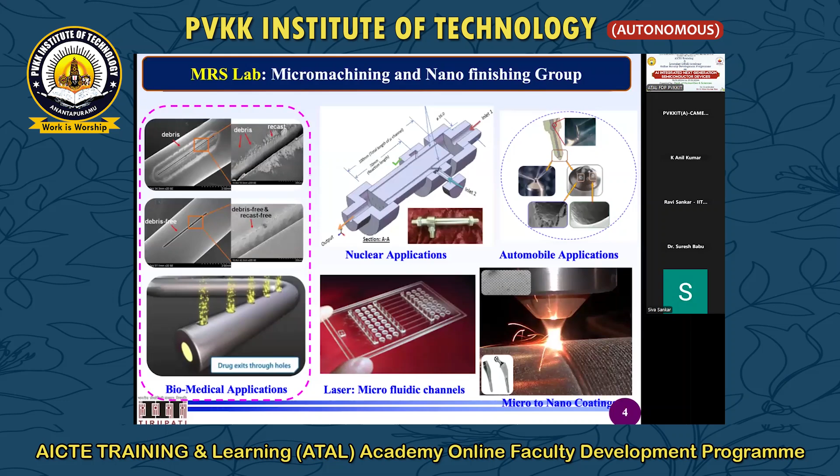That is evident from your mobiles. Mobiles will always heat up. When they heat up, there will be a cooling fluid, and this cooling will be circulated in the microfluidic channels. That is most important in the semiconductor industry. As important as the semiconductor materials are, the cooling channels and cooling materials are also important. I will just brief you on micro channels that we can cut with lasers and various other sources for nuclear applications and so on.

This is a machine. This is not the exact machine that we have. This is DT110, which is an older machine. What we have is DT110i, which is an intelligent machine where we have micro turning, micro milling, micro EDM, micro drilling, micro EDM drilling, micro wire EDM, micro electric discharge grinding, micro die sinking EDM. Apart from it, micro laser, and another attachment specialized for ceramic applications like semiconductors, that I will show you in the upcoming slides.

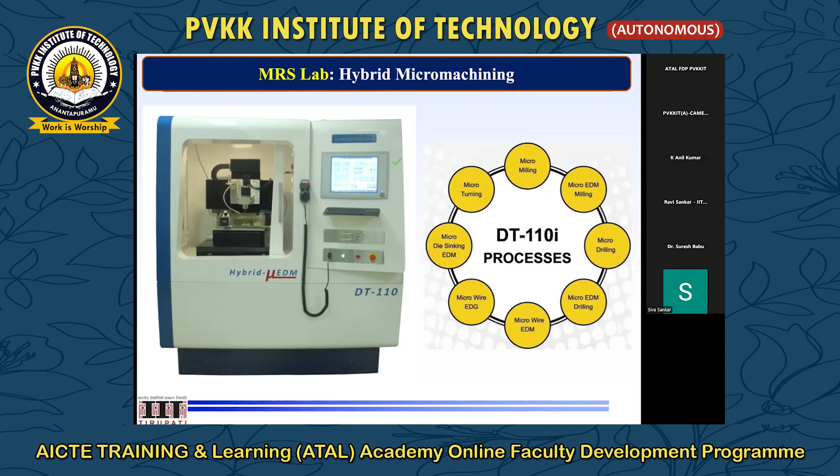That attachment is called simultaneous electric discharge chemical machining. It is a combination of EDM plus ECM. So this is how micro turning is done for making electrodes of 30 microns, 50 microns. You may be thinking how this is relevant to semiconductor applications. In semiconductor applications, for example, I want to make channels for cooling fluids, or any fine elements that I need to manufacture.

So what I require is to make the surface area more. If I want more surface area, I need to make more and more micro components, for example, fins. The more fins you can manufacture, the more heat you can dissipate. And you have to manufacture them on a material called OFHC copper. I don't know how many of you are aware of OFHC copper. It means oxygen free high thermal conductivity.

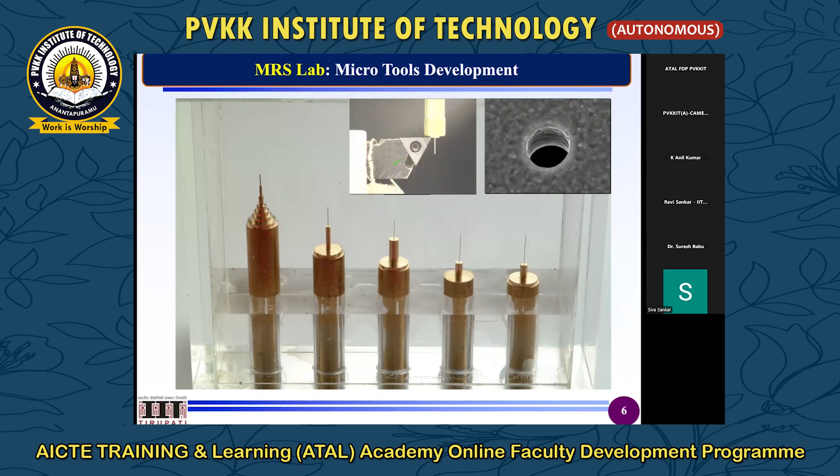These types of materials we manufacture, and this will go directly onto the top side of the chip. Whenever the chip heats up, this oxygen free high thermal conductivity material will take the heat and dissipate it. That's how the cooling of your mobiles happens. For that application, this is one of the beautiful processes. Now you can see here the microfins and micropillars.

This has multiple applications. One, you can dissipate the heat. This directly sits on the semiconductor chips and dissipates the heat. At the same time, if you make an array of surgical pins, the pin diameters will be very small, like 10 microns or so. This will act as a die for drug delivery systems. So an array of pins can be used either for semiconductor applications or for biomedical applications. Now, what is the beauty of this?

The beauty of this one is, if you combine semiconductors with biomedical applications, you can use this particular thing as a die, where you make a silicone mold. From the silicone mold, you can make another one where you have a flexible biomedical point-of-care drug delivery system. I don't know how many of you understood.

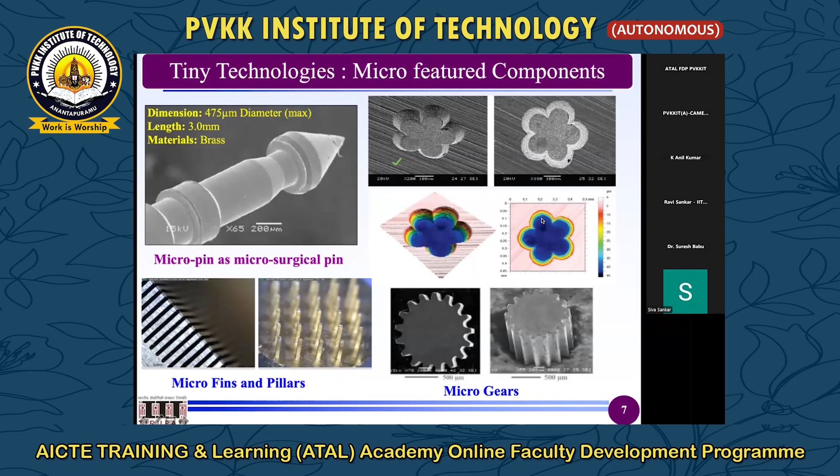The second one is simultaneous electric discharge chemical machining. You see how smooth this is? This will be clearly explained in the next slide.

Case number 1 is on a semiconductor material — I'm purely explaining on a semiconductor material. So I want to make a pocket on a semiconductor material, such as silicon. What can you do? Being a semiconductor, it has certain electrical conductivity properties because it's not purely an insulator. In that circumstance, the surface roughness you get is this. In the other case, simultaneous electrical discharge chemical milling or machining — because the tool is rotating, it's called a milling process — you get a very, very smooth surface.

Now you see the difference here on a semiconductor material. I am not talking about any other material because this process is specifically on semiconductors. You see the red line — that's the surface roughness measured from the micro-EDM process: 142 nanometers. With the same input conditions, simultaneous EDM plus ECM gives 22 nanometers.

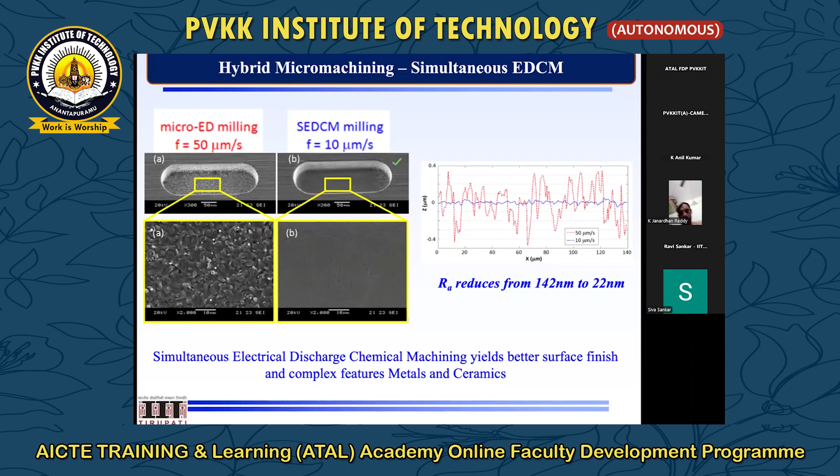When it comes to completely nano finishing of semiconductor materials, the objective is to finish mirrors and lenses that can be made on materials like zero-dur. I don't know if many of you are well aware of ceramics like zero-dur.

Zero-dur: zero means, anyhow, it is zero. It is one type of semiconductor or lens material, whose thermal expansivity is approximately zero. That means the thermal coefficient of expansion is approximately zero.

So what is the beauty of it? We send a lot of electronic components across the planets. For example, if I want to send something on the moon, or if there is a Mars rover.

When you send something to the Mars rover or to the moon or any other planet, once it lands, the equipment comes out, the satellite comes out and starts taking images. When it starts taking images, what is the biggest thing you have to understand?

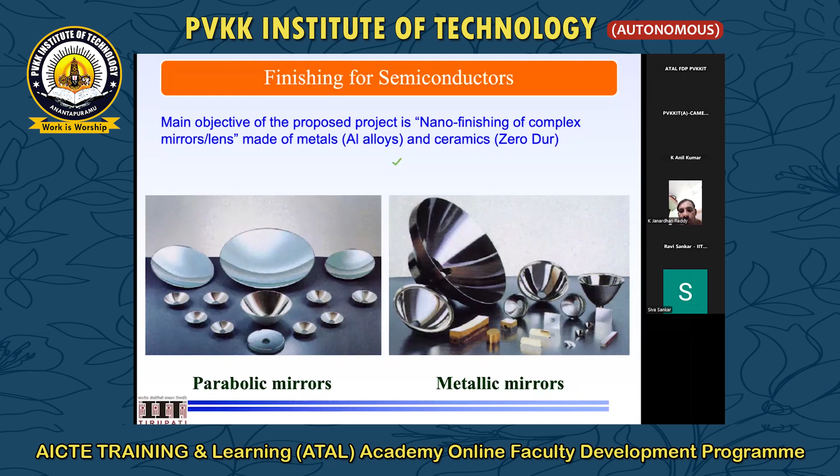As simple as that. For semiconductor applications, silicon applications, all these applications, when you send them there, you need to understand these particular things.

So the first process one can use is magnetorheological finishing process. Let me show you, I am pumping the liquid. I'm just looking for a video to demonstrate this.

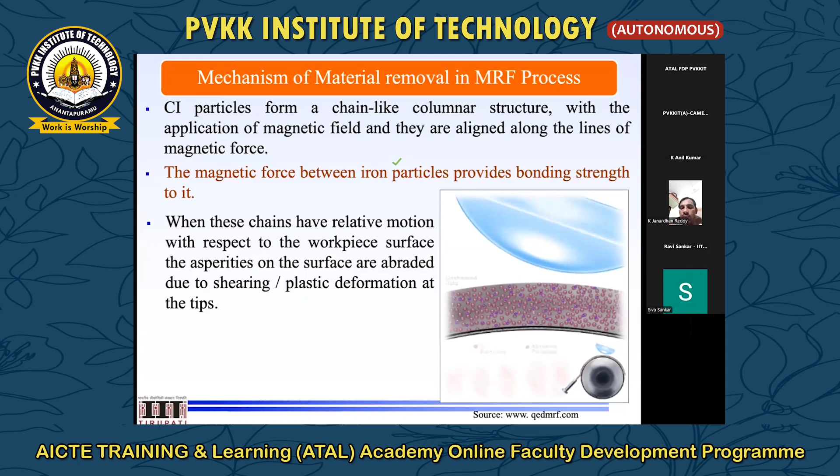You can see the liquid I am sending, and as I apply a magnetic field, these brown particles form chains. When randomly oriented, they're scattered, but when I apply a magnetic field, all get aligned properly. Brown ones are CIP particles, iron particles, and purple ones are abrasive particles. When it forms a flexible magnetic chain, the lens comes in and finishing takes place.

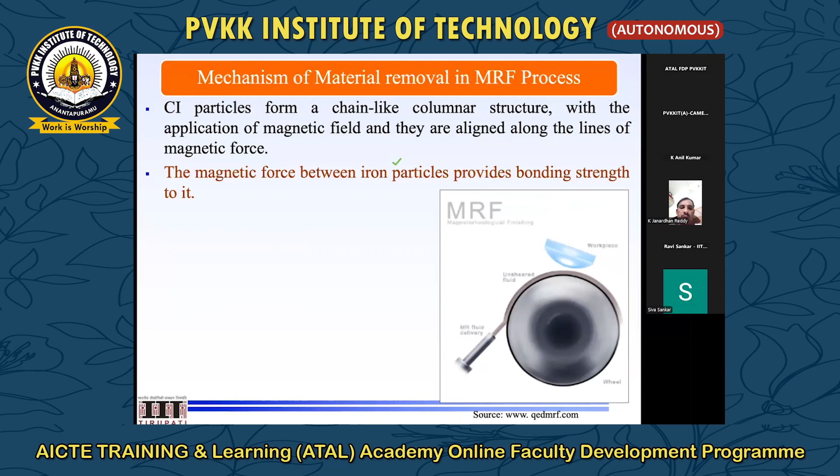Let me go back to explain this better. The same thing you saw, I am pumping it through the nozzle. There is an electromagnet, and when the fluid reaches it, it becomes solid or semi-solid. The liquid becomes semi-solid, and when you apply a silicon lens or any type of lens, polishing takes place. You can see the liquid flowing, and when it touches the flexible grinding wheel, it forms a strip, because of the magnetic field.

Why does it form this strip? It has three materials in it: one continuous phase, silicone oil, and two discontinuous phases - one is CIP particles, which are carbonyl iron particles, meaning 99% pure iron particles, and another is abrasive particles. You mix all these things and send them through a nozzle.

When it reaches the electromagnet, it magnetizes. When it magnetizes, what happens? When you apply a magnetic field B, magnetic field intensity, like 0.25 Tesla, 0.5 Tesla, 1 Tesla or something - normally magnetic field intensity is measured in terms of Tesla.

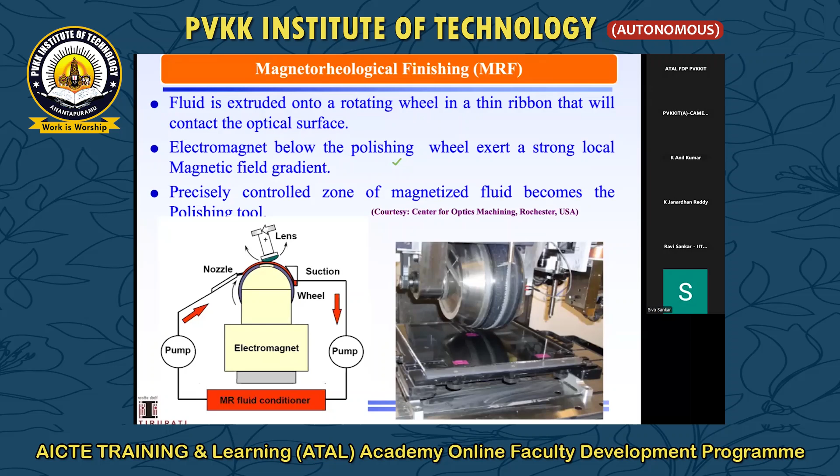Now, for structure, if you have fewer abrasive particles, you can go for an open structure, and if you have more, you can go for a dense structure. The bonding material here is CIP particles and so on.

Now you can see which type of lenses you want: 3D lenses, 2D lenses, concave lenses, these types of lenses. Semiconductor materials can also be used for the same thing. This works very well for brittle materials like silicon, silicon carbide. Nowadays people are talking about silicon carbide mirrors. Silicon carbide is coming as a very good alternative for semiconductor applications. In some applications, silicon nitride is also coming up in a great way for radome applications where you capture signals and other things.

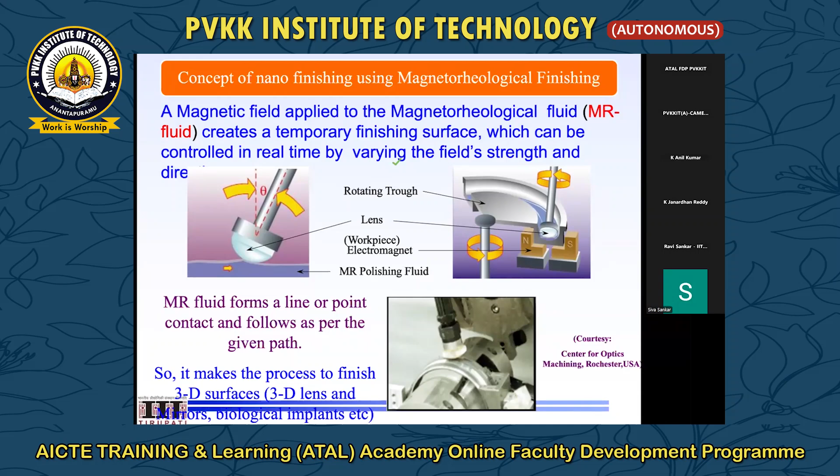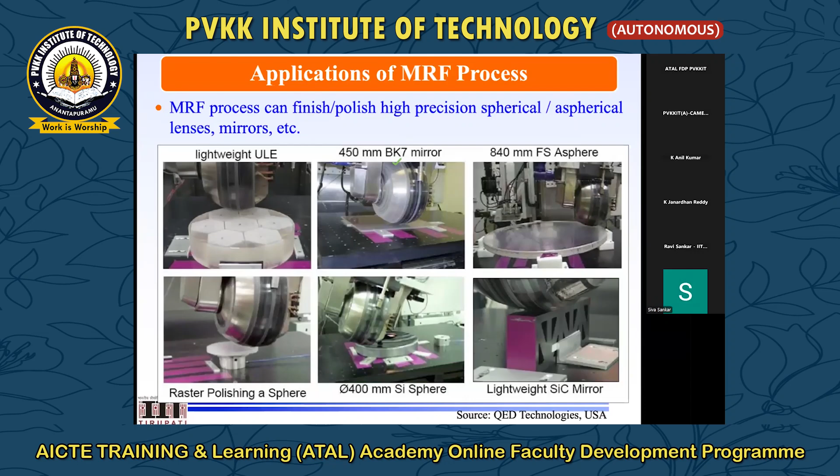This is one of the MRF setups that we have fabricated on a milling center, a CNC milling machine. This is the CNC milling machine where the attachment has been removed, the tool master has been removed, and we fabricated this in our laboratory at IIT Kanpur, here where I am currently. I am not in IIT Tirupati anymore, I just came to IIT Kanpur. I am very happy in my one of the home institutes, that is IIT Kanpur.

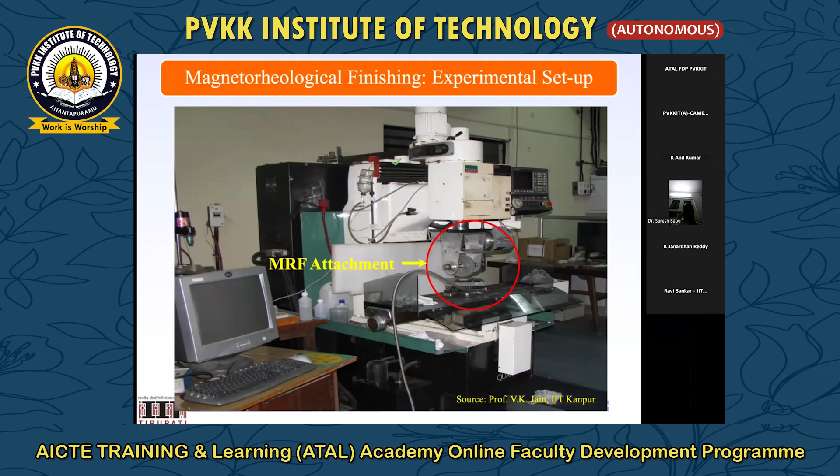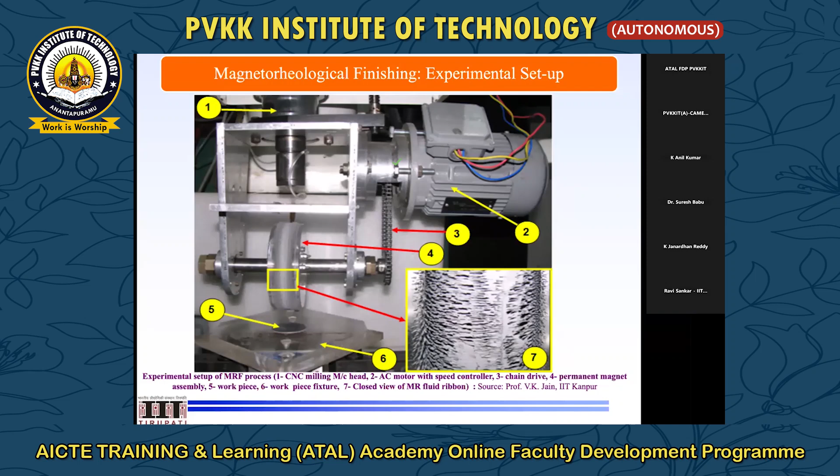So this attachment, if I magnify it, I will show you, it looks like this. If you see here, I have a pump where the liquid is coming here, and this is a perspex based, acrylic based grinding wheel. In between that you have an electromagnet. Once the liquid falls, it forms like this. This is called a flexible magnetic abrasive brush. When you see a flexible magnetic abrasive brush, this is going to shear when you rotate it. So shearing of this will make a very good polishing solution.

This is how the schematic diagram also looks, because whenever you have a setup, first and foremost you have to make a schematic showing where you want the wheel, where you want the suction pump, where you want the releasing pump, and how the MRF conditioner can be maintained and so on. These are all the things you need to do, then you need to design it.

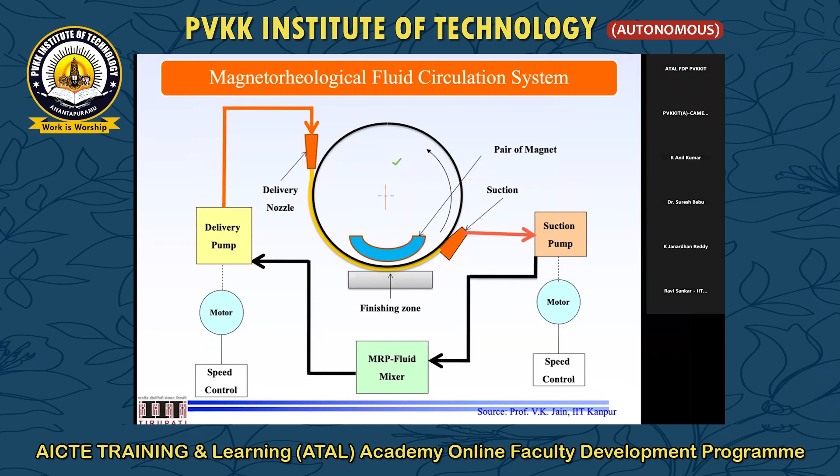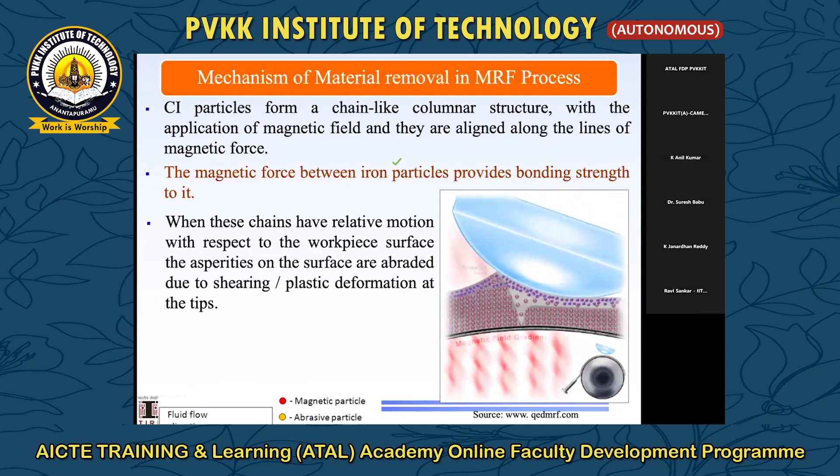Now the mechanism of material removal. If you see here, the mechanism of material removal can be seen clearly. This is the animation which I am not going to talk much about, but this is how the finishing takes place.

Stages: I have a surface peak. When my abrasive particle approaches, what happens? The magnetic field holds the CIP particles, these are all called CIP particles. Now this will support and move it. When it moves, what will happen? Microchipping action will take place.

This micro-chipping action is for one particular peak. Similarly, you may have as many peaks as possible. That's why you do the finishing action. Sometimes your results may not be as accurate as you expect because of some practical problems. If you see here, I have an abrasive particle, and I am finishing it.

When I start finishing it, my particles which are sheared will fall inside the valleys. If you measure the surface roughness, it will give you a very low surface roughness because your chips are inside. So when you still polish it, what will happen? There is a chance that these loaded particles will dislodge, giving rise to a larger roughness value.

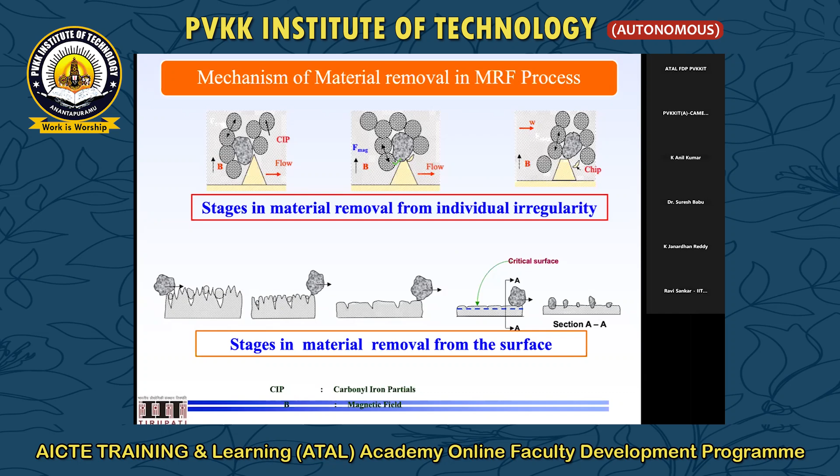So that means the surface roughness increased, which is good for us. After that, it decreases. I mean, it decreases, then it increases, and so on. So you should understand the science behind it for that purpose and other things.

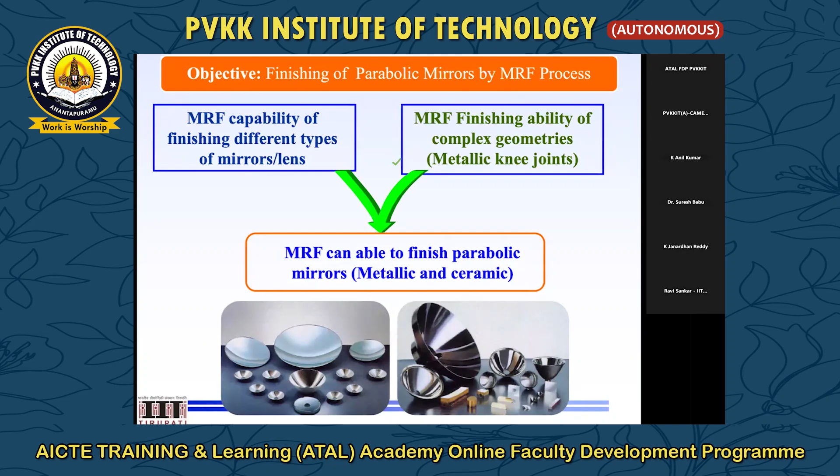Anyhow, these are the things that we have polished: knee implants, parabolic mirrors. For example, if you see here, these are the MRF capabilities to finish ceramics as well as metals. Another one that we have is convex and concave shapes by ball end. The mechanism is approximately the same. Instead of going for a wheel type, we are going for a ball type.

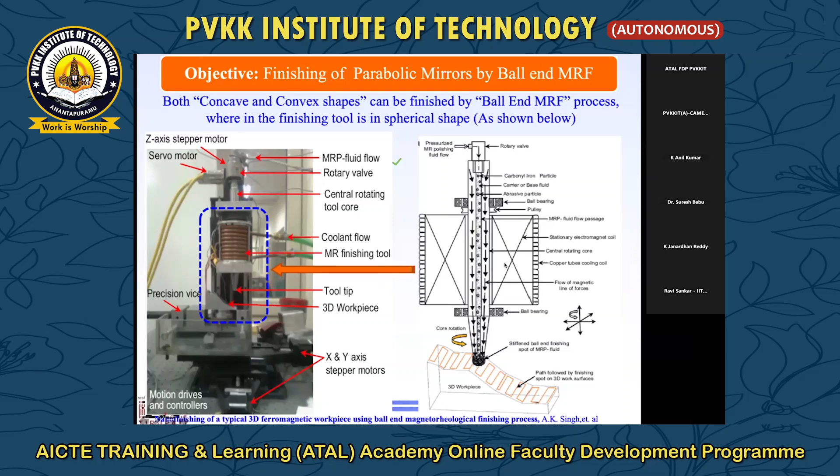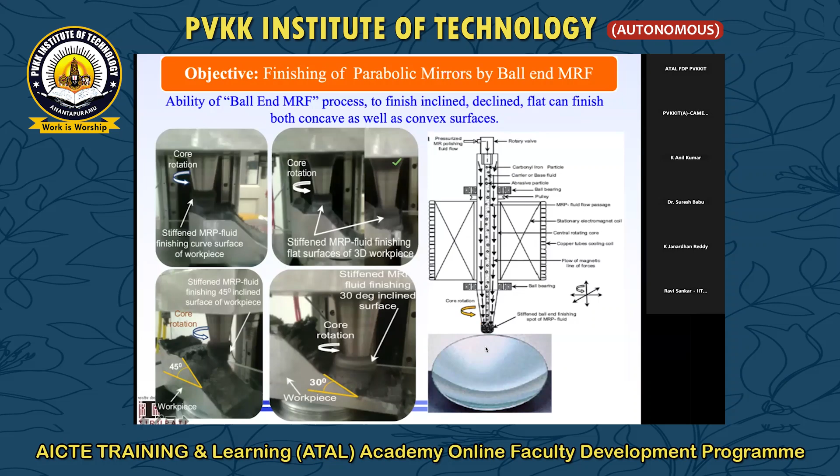So here the magnetic field is like this, where you are sending a liquid, and these are the electromagnets, and the finishing action will take place. Now you can see how the finishing action takes place on the workpiece materials. So now we have semiconductors. This particular workshop is mostly for semiconductor applications, so this is a practical example of a semiconductor that you are going to see here.

So this is a silicon blank. Normally silicon blanks come as cylindrical silicon blanks. Once you get a cylindrical silicon blank subjected to doping, for its electrical conductivity, you can cut it using the wire EDM process, if you have a very sophisticated wire EDM. Why I said sophisticated: at IIT Tirupati we have a sophisticated wire EDM worth about 80 lakhs or nearly 1 crore.

This is from AgieCharmilles, a Switzerland-oriented machine where you can precisely cut any material that is electrically conductive. So these semiconductors are cut by diamond saws or abrasive saws, or sometimes by wire EDM subject to their doping and electrical conductivity. So when you cut, the surface looks like this. It's very, very rough, and you cannot use these rough surfaces. So these surfaces need to be modified like this

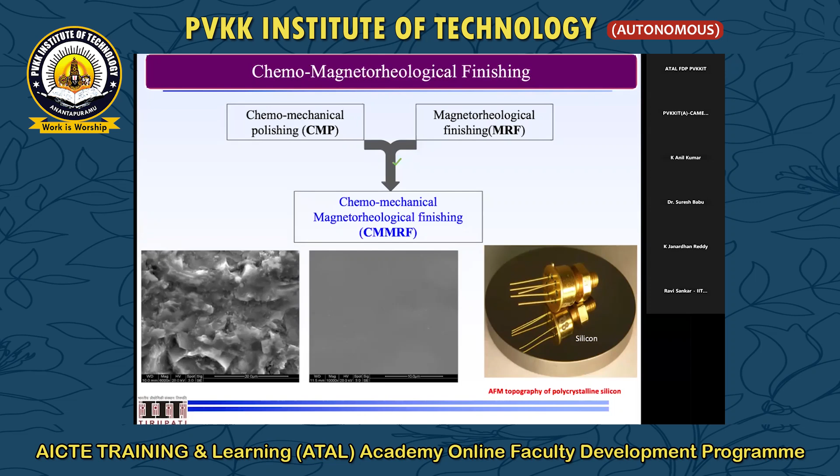Okay, so this is my chemomechanical magnetorheological finishing process for silicon surfaces and silicon wafers. The surface roughness that we have achieved is 10 angstroms. So this is a beautiful process when you want to make flat surfaces and so on. So here ends my silicon-based samples.

What I mean to say is the MRF process, magnetorheological finishing, predominantly works for flat surfaces because the magnetic field has an intensity. On a flat surface you can maintain the magnetic field intensity uniformly, but on a curvature, the field intensity will fluctuate. So here ends my semiconductor-oriented finishing of surfaces. This is a deterministic finishing process for flat, concave and convex surfaces.

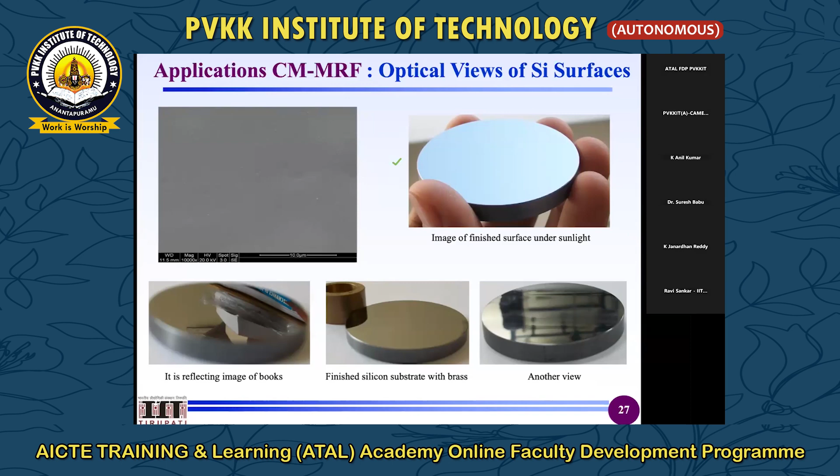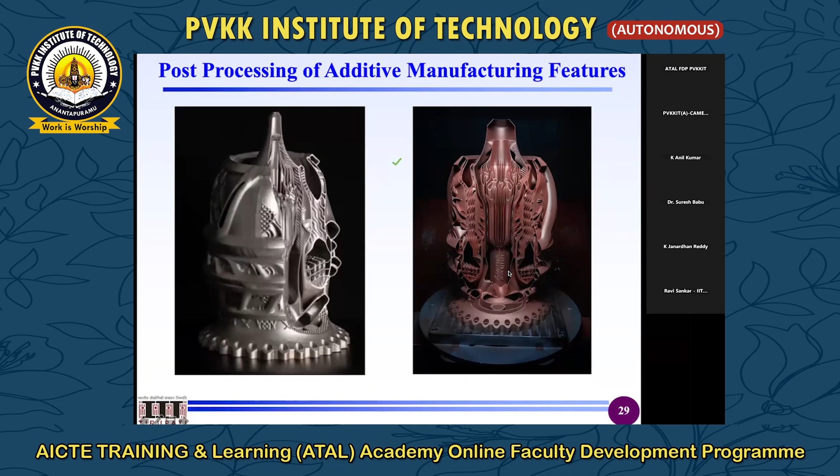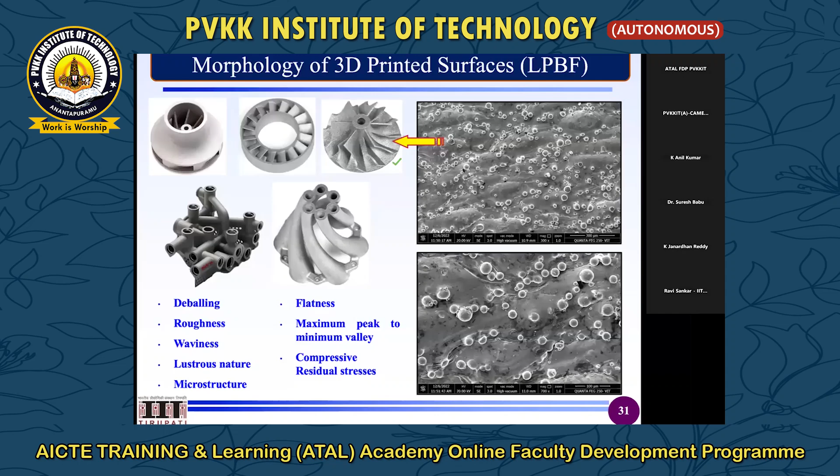For example, I have complex surfaces like additive manufacturing surfaces. This is a copper sample. If I want to make conformal cooling channels, roughness is a very big challenge. There are a lot of problems: deballing, roughness, waviness, lustre, microstructure, flatness, maximum peak to minimum valley, compressive residual stress and so on. So we can also do polishing of these things.

So half an hour means I will take another half an hour where I can also include the.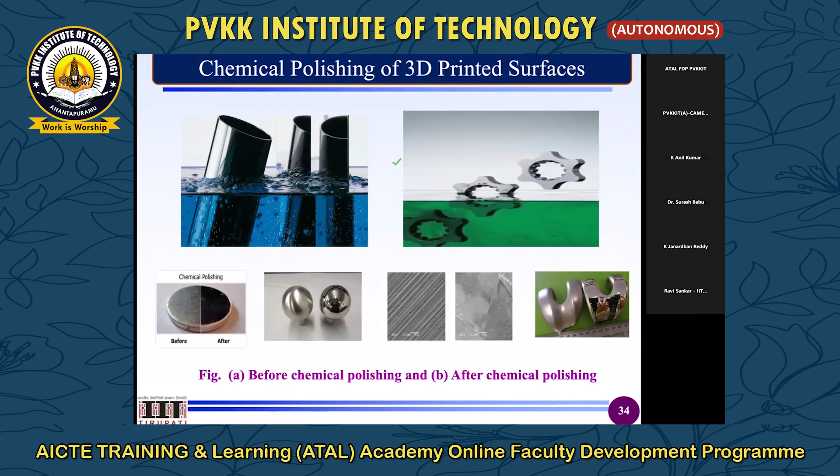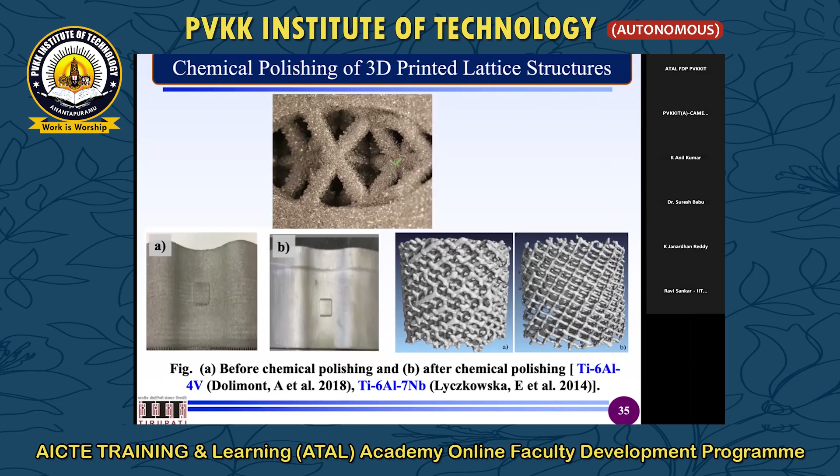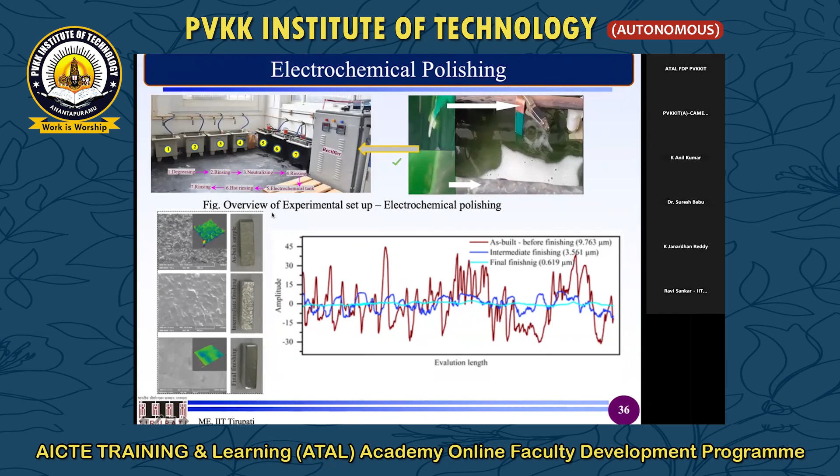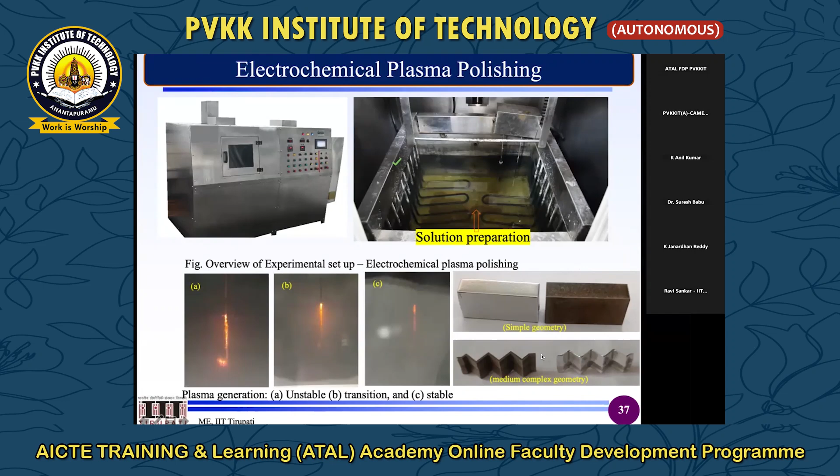In the electrochemical workstation, we have rinsing, cleaning, electrochemical reaction one, rinsing, electrochemical reaction two, a lot of things we can work on for electrically conductive surfaces. Then we have a process called electrochemical plasma polishing, which is a better process for lustre. It is very good for making very shiny samples. For example, this is my initial surface, and you can make such shiny surfaces.

So this is one of the examples of this particular process. So now the question is why you require this much surface roughness. This much surface roughness is required because of aesthetic appeal, quality maintenance and so on.

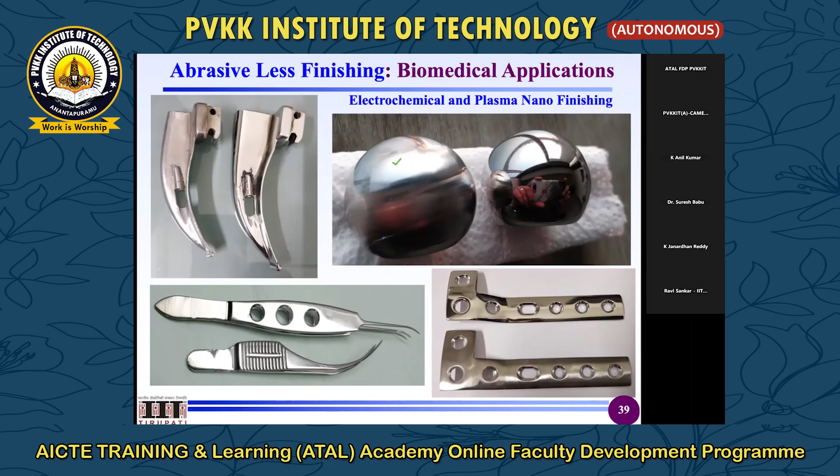So we are going to finish the conformal cooling channels. These type of conformal cooling channels can be there in the die and mold industry. At the same time, these type of molds will be there in semiconductor cooling applications also, or any other cooling applications.

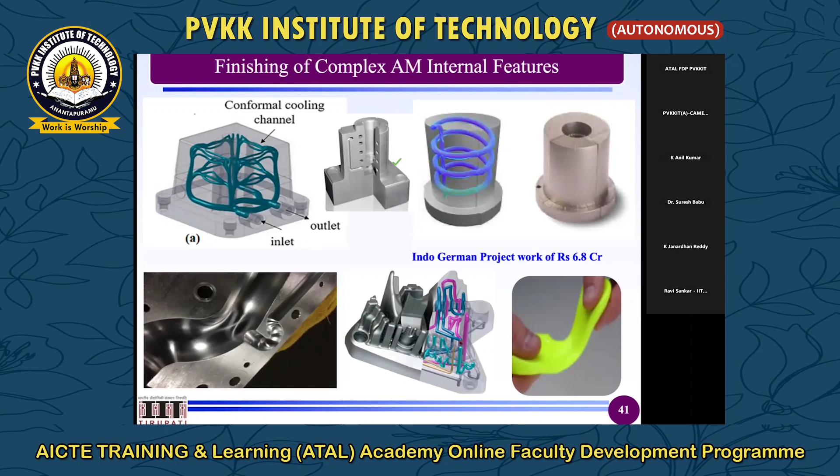So, what are the channels? These are very, very complex channels. It is coming here, going there, coming here. It is not straight channels. It has certain curvatures and so on. So, to make this one, we also make the semi-solid based cutting tools, that is here. And how it works, you just watch.

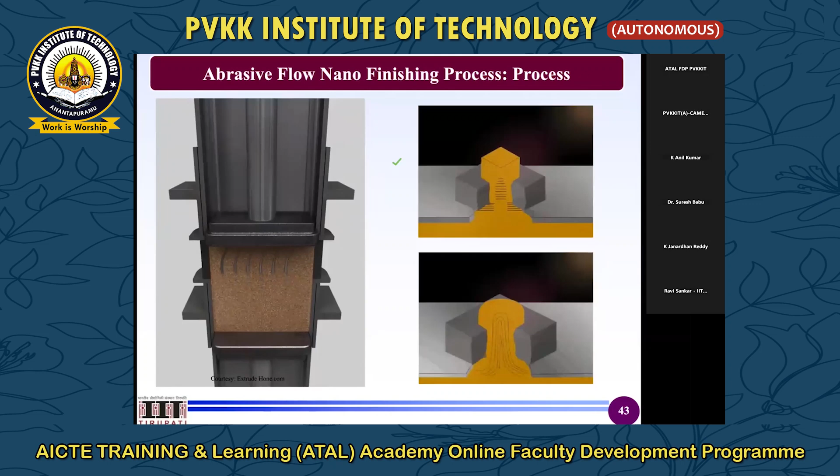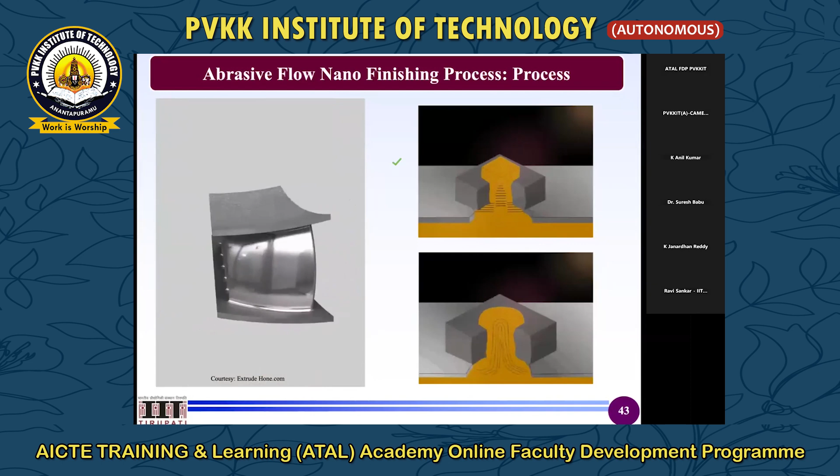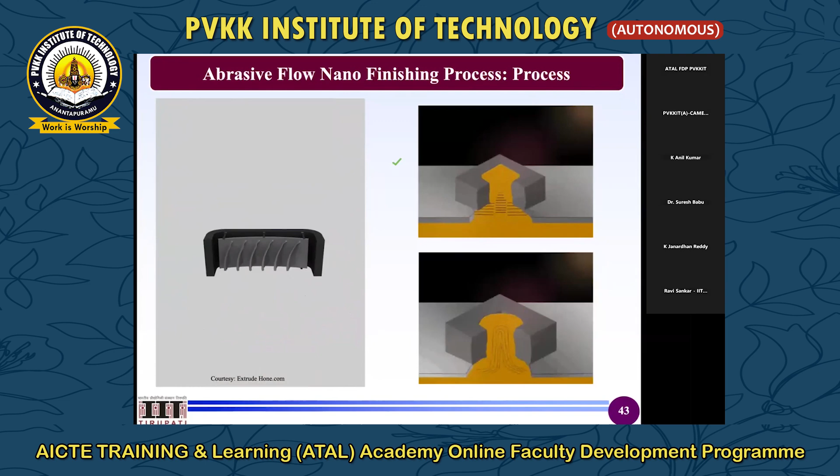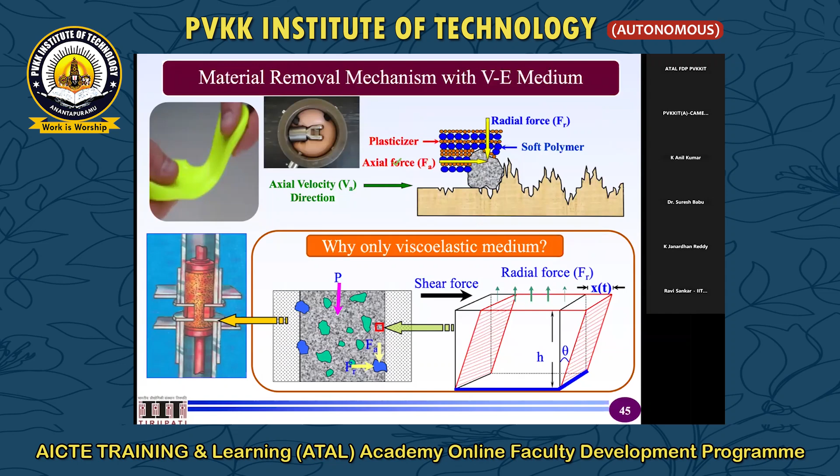You can see here how we can polish the vanes of additive manufactured features using low viscous medium to high viscous medium, for this type of applications. Okay, so you can see before and after finishing, and this is the technology behind it; we have patented almost most of the technologies. And this particular medium, what you are seeing, is this one.

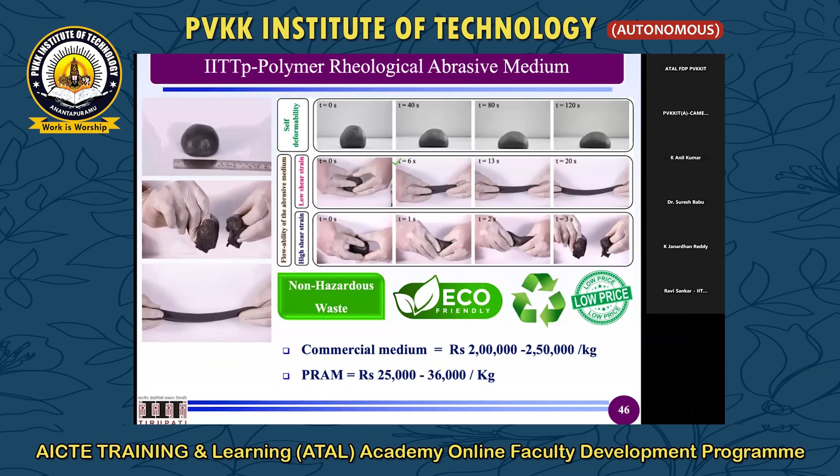Commercially this particular medium is about 2 lakhs to 2.5 lakhs per kg, which is not available in India because of defense and aerospace oriented things. However, we provide it to all the Indian organizations who are in touch with us, in the 25,000 to 36,000 range, almost 10 times less per kg.

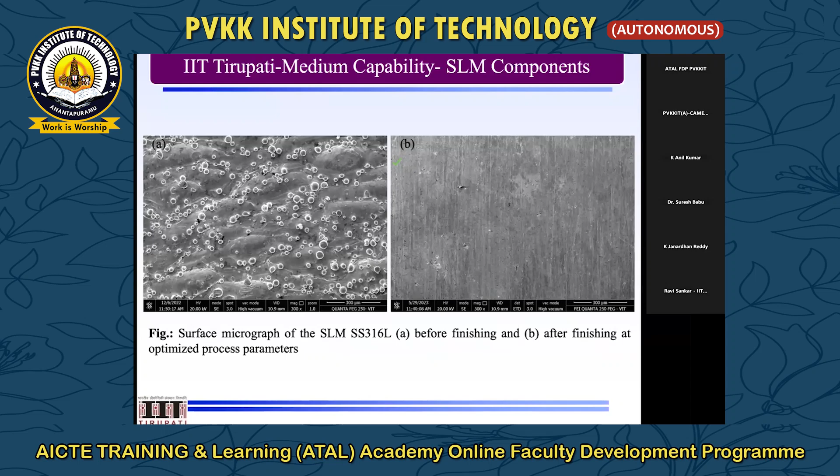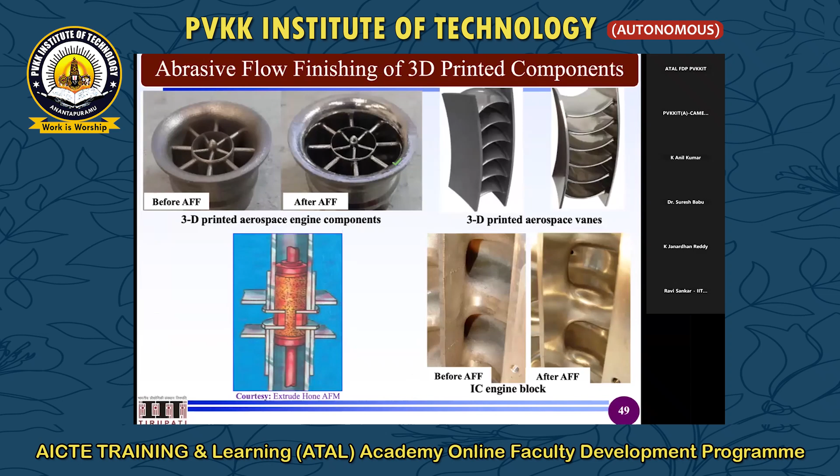And these type of things will be polishing very, very complex surfaces. To understand the efficiency of the particular process, we try to use flat surfaces. From flat surfaces, one can go to turbine blades and so on. So you can see aerospace engine components, most of the engine components and so on.

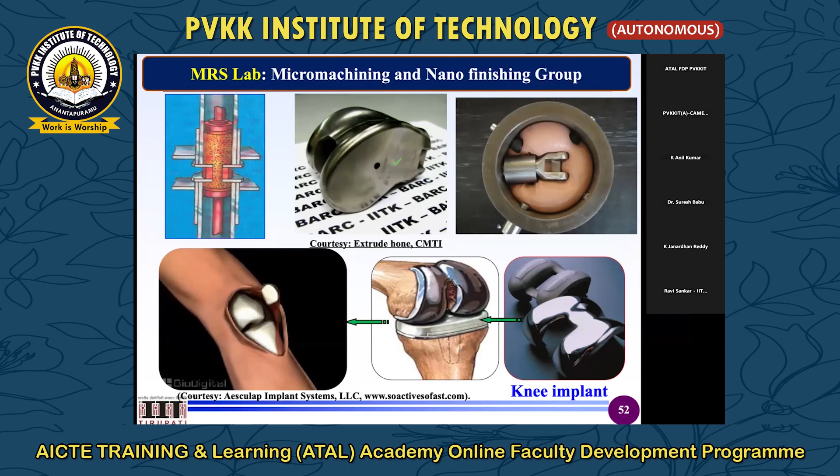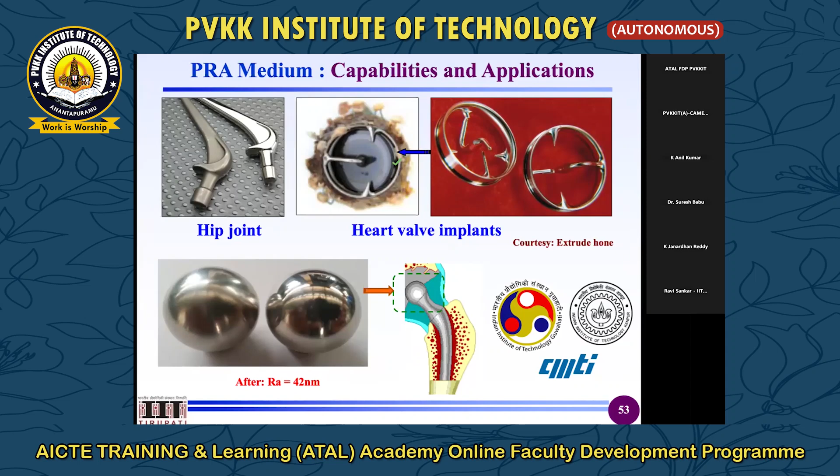So as I said, Rome was not built in a day. This particular work our research group started under the guidance of Professor V.K. Jain at IIT Kanpur in 1996. By 2020, we were able to make a commercial system, and we are now finishing commercial components and so on.

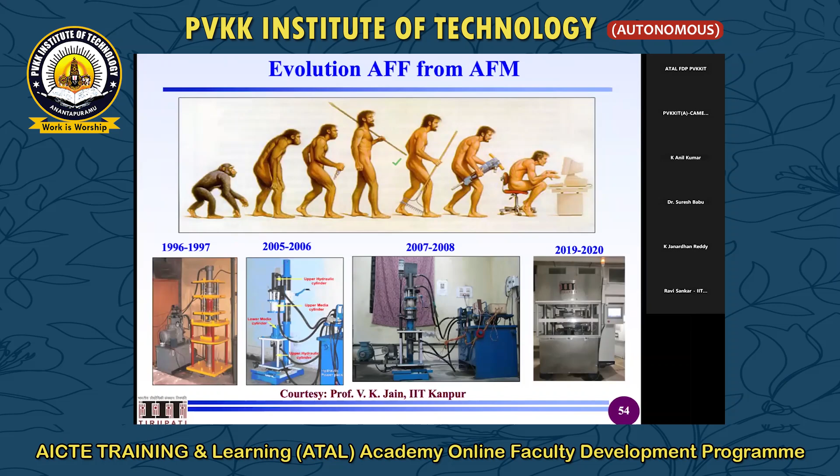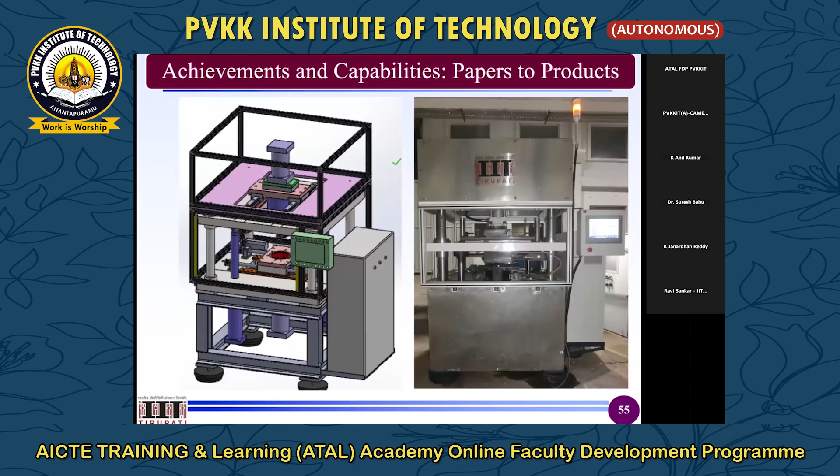This is how the machine looks, the interior part, as well as the exterior part and so on. This is the front view as well as the side view of the machine that we fabricated. This is a complete HMI machine. It's a smart machine. Only loading and unloading is to be done. Rest all the things it can do.

You see here, HMI is there. Human machine interfacing is there, where I can feed how many cycles are required, what pressure is required, and also what temperature I want to maintain the medium at. If the medium temperature is rising, it can send cool fluids to cool the fluid chambers, and that's how it has a lot of smartness. It can measure the forces, the temperatures, and display them on the human machine interface.

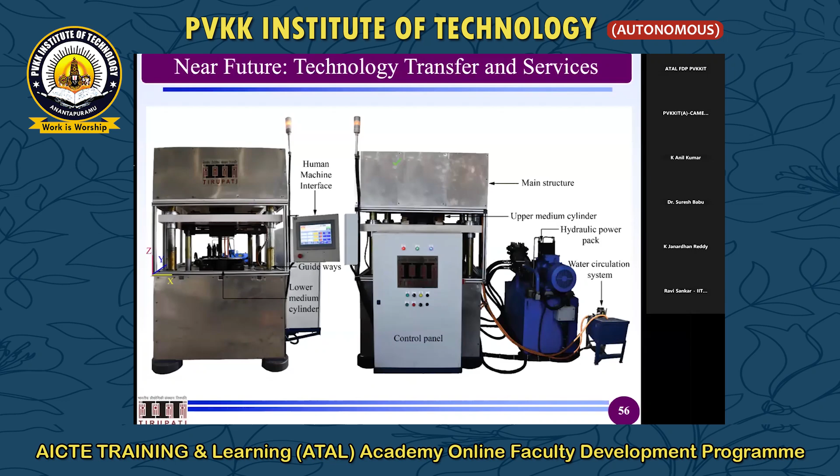And then we have a rheometer, which I have not talked about much, where you might have seen the medium where you were flowing, it is stretching, it is breaking. So the rheological properties are completely unique. In those circumstances, the science of flow and deformation you can measure using a rheometer.